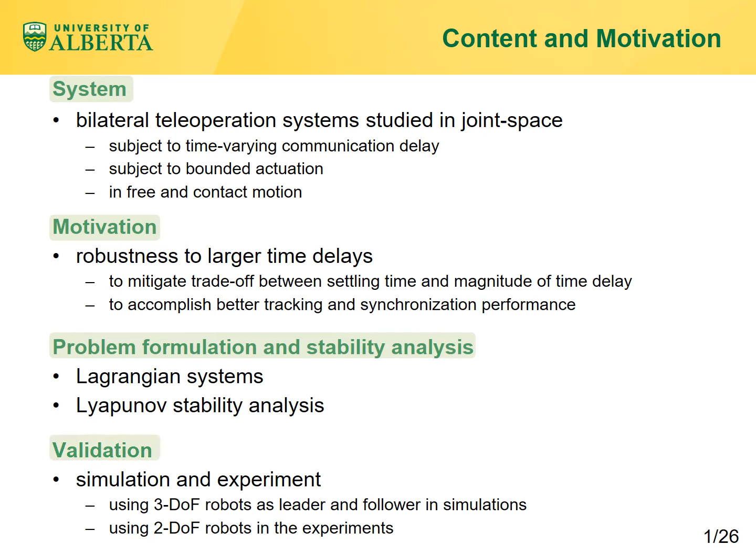Also, Lyapunov stability theory is utilized for stability analysis. For validation of theoretical findings, we have done simulations and experiments. Here you see the schematic of a bilateral teleoperation system. A bilateral teleoperation system is comprised of four main elements, namely leader robot, follower robot, communication channel, and controllers.

The controlled coupling between robots makes the follower robot to be under the control of an operator who manipulates the leader robot. Specifications that usually are studied in these systems are stability of the system, performance including tracking in joint space or task space, and force reflection or generally transparency, which measures the quality of teleoperating and how good the force reflection provides the operator with a sense of manipulating the object directly.

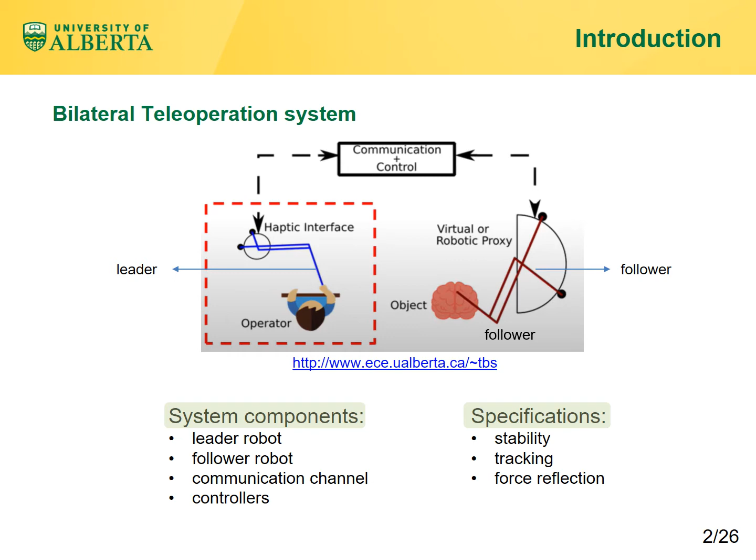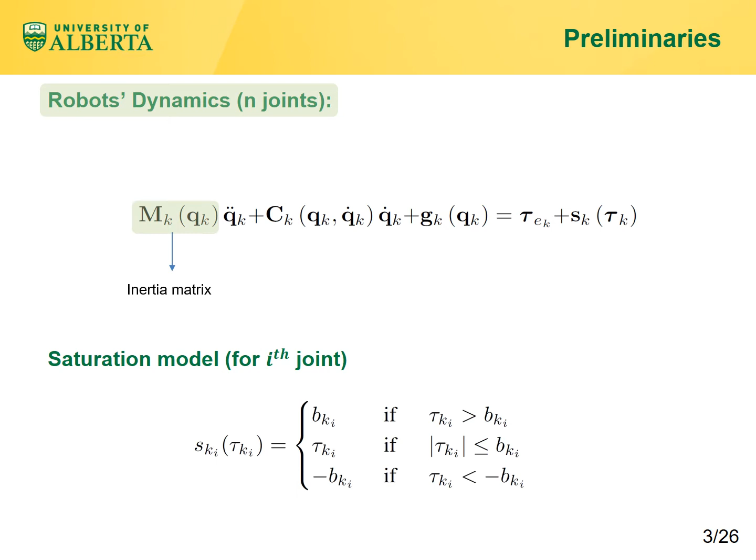This work studies bilateral teleoperation system in the joint space, given that the manipulator's motions are modeled by Euler-Lagrange equation. M_k is inertia matrix, C_k is Coriolis centrifugal matrix, G_k is the gravitational vector, tau_ek is the exerted torque, S_k(tau_k) is the control input subjected to saturation, q_k denotes the joint positions, q dot_k denotes joints velocities,

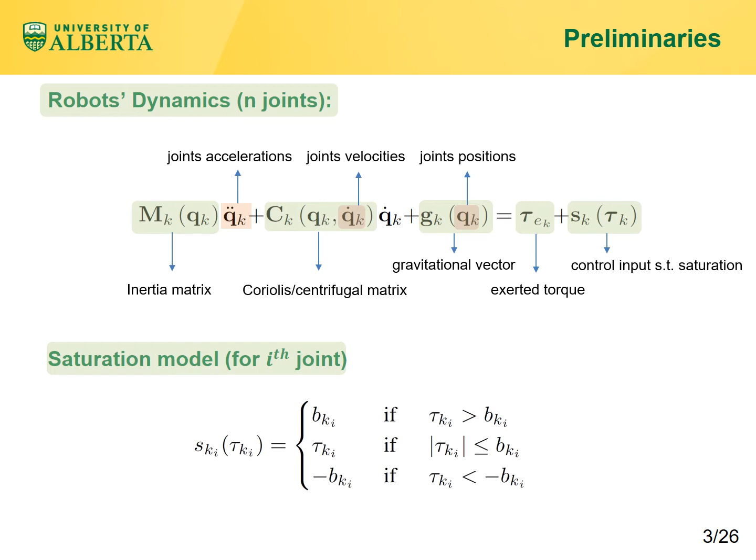and q double dot_k denotes joints acceleration. The saturation of the control signals is modeled by saturation function, where B_ki is the saturation level of i-th actuator and tau_ki is the controller of i-th actuator. Note that the subscript k shows leader and follower robot.

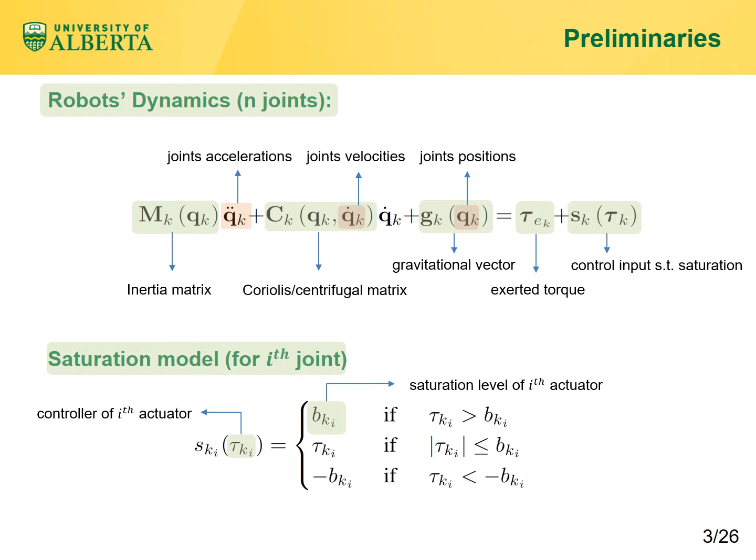Some assumptions are considered. The saturation level of each actuator is larger than the upper bound of the relevant element of the gravitational vector. Here, omega_ki is the upper bound of i-th element of the gravitational vector. The first assumption implies that each actuator can overcome its corresponding gravity. Second, time-varying delays are assumed to be continuous in time.

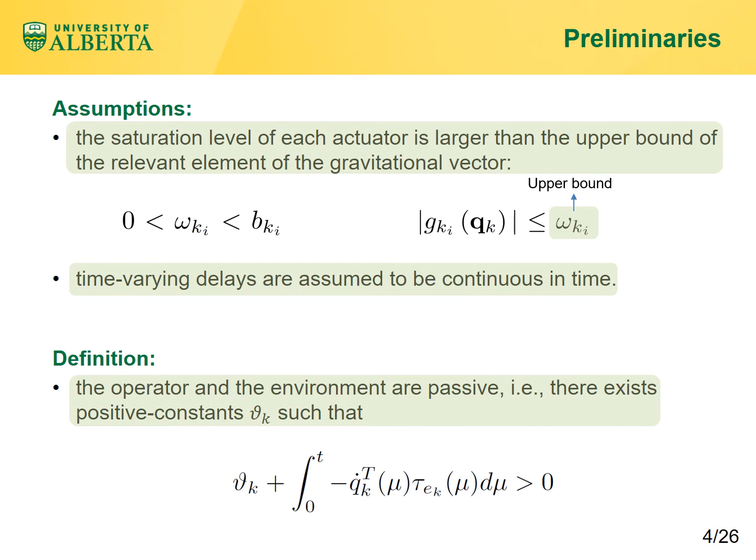Also, we have a definition that says the operator and environment are passive if there exist positive constants such that the relation you see is satisfied. Joint position errors are defined in two sides, namely leader side and follower side. Since the system is a bilateral teleoperation, signals are mutually exchanged between two robots.

In the leader side, the error is the difference between joint positions of the leader and delayed positions of the follower that are transmitted to the leader side. d_s is time-varying delay in the follower to leader communication channel. In follower side, the error is the difference between the joint positions of the follower and the delayed positions of

the leader that are transmitted to the follower side. d_m is time-varying delay in the leader to follower communication channel. Also, e_m0 and e_s0 errors are defined for ideal conditions, meaning having zero delay.

Here is the proposed nonlinear controller where sigma 1 and sigma 2 are positive real numbers. Capital P is a nonlinear function that has some properties, which will be mentioned next. G_k is for gravity compensation. Also, for simplicity and later usage, the first three terms in the controller are defined as delta_k.

If we define small p_i as the elements of the nonlinear vector function capital P, they are required to have some properties. They are strictly increasing, they are continuous, they are passing through the origin, they are concave for positive arguments and convex for negative arguments, they are odd functions, and they have continuous first derivative around the origin. Also, N_i is defined as the supremum of scalar nonlinear function p_i related to the joint i.

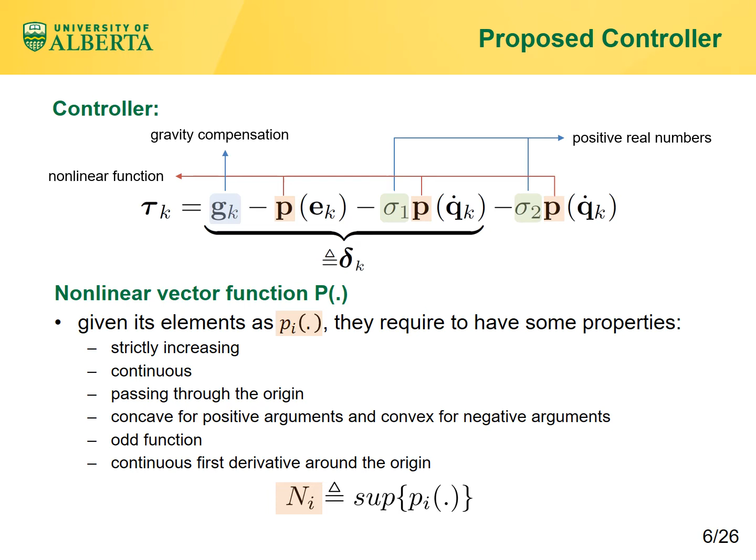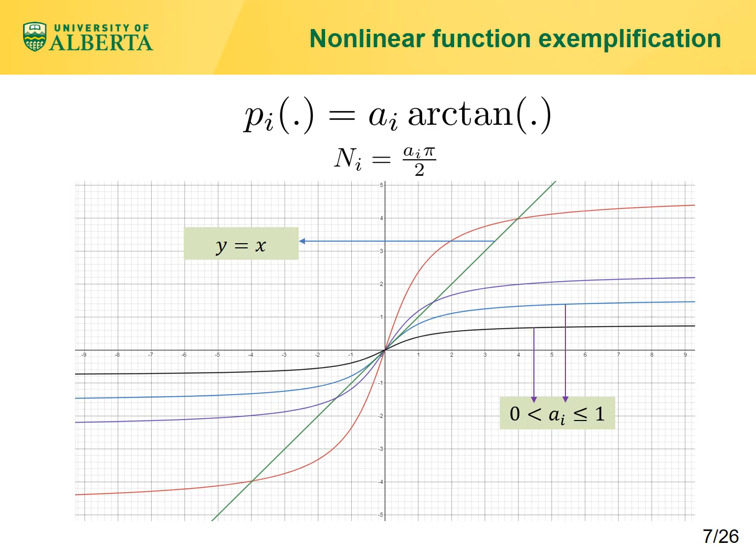For instance, the arctangent is a nonlinear function that embodies all the mentioned properties in the previous slide. You see the function in two cases. First, a_i is bigger than 0 and less than or equal to 1. And second, a_i is larger than 1.

Here I bring up two lemmas that are utilized in the stability analysis. Please note that d bar sub s is the maximum of time varying delay in the follower to leader communication channel, and also d bar sub m is the maximum of time varying delay in the leader to follower communication channel.

Let x sub t be the state of the system where it is equal to x of t plus zeta, and x of t is comprised of joint positions and velocities. Zeta is between minus d max and 0, where d max is the maximum time delay across the communication channels.

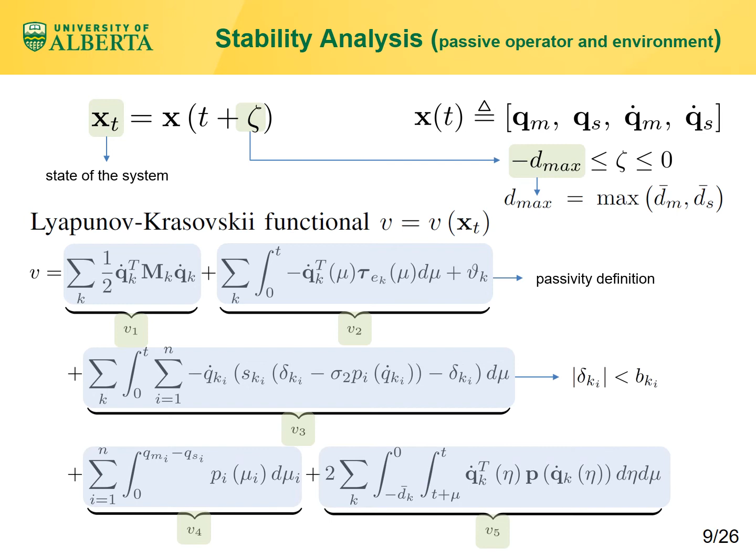For stability analysis, we come up with a Lyapunov-Krasovskii functional where it is the summation of v1, v2, v3, v4, and v5, where v1 is in a quadratic form, so it is positive. v2 is positive because of passivity definition. v3 is positive if the absolute value of delta sub ki is less than b sub ki. Also, v4 and v5 are positive since the vector function p is an odd function.

The time derivatives of the Lyapunov functions would be respectively as, and therefore v dot would be the summation of these terms. Finally, the time derivative of v can be simplified to the relation you see, so for having v dot less than or equal to 0, we need to have sigma 1 larger than 2 times tr, where tr is the maximum round-trip delay defined as you see. Thus we have three conditions, where the first one is equivalent to the relation mentioned for ni.

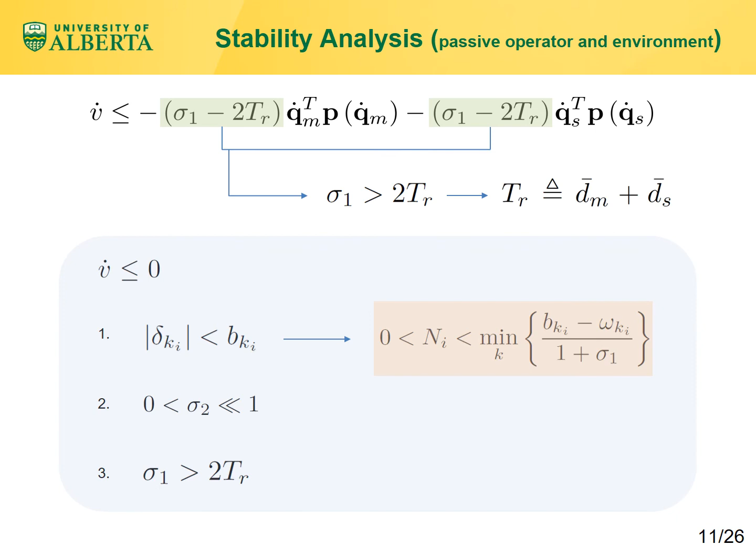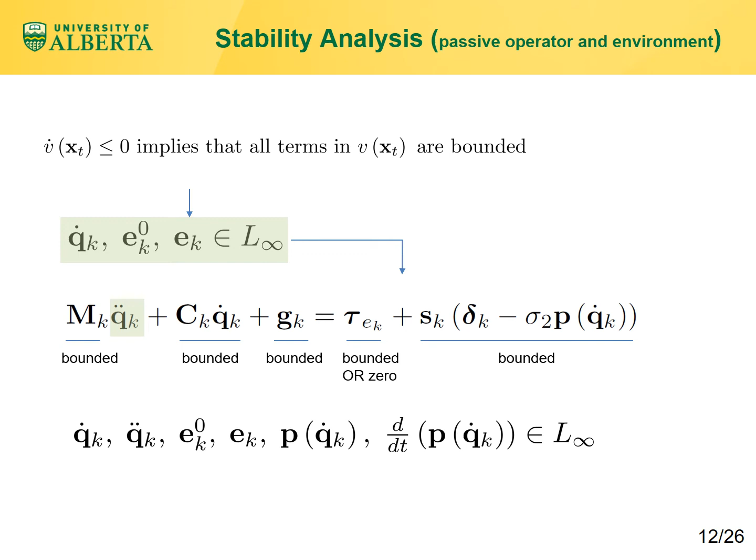v dot less than or equal to 0 implies that all terms in v of xt are bounded, so error signals and joint velocities are bounded. By substituting them into the closed-loop dynamics, and given that these underlying terms are bounded, we can conclude that the accelerations of joints are also bounded. Given that the derivative of the function p is bounded, we can conclude that these are bounded.

Consider again the final relation we found for v dot. By defining psi and integrating both sides of this relation from 0 to t, and regarding the figure you see, we would have three cases, which implies that q dot k or p of q dot k is a member of L2 space, or the L2 norm of those time functions is bounded.

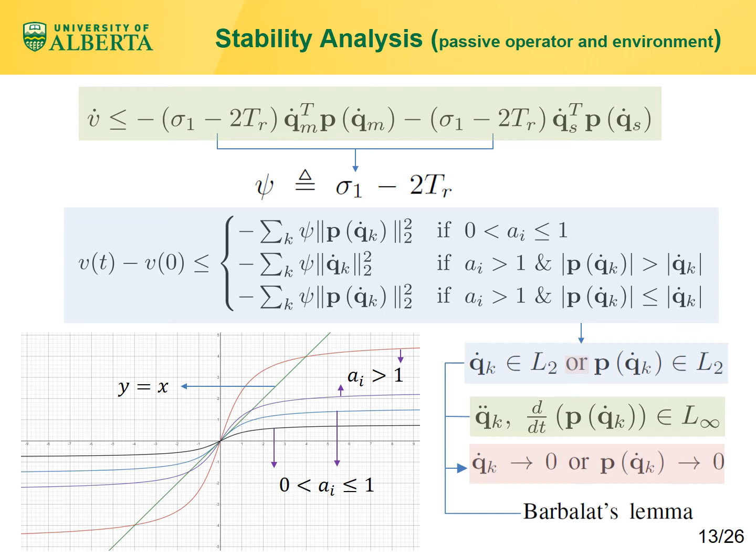Previously, we knew that the joint accelerations and the derivative of p of q dot are bounded, so using Barbalat's lemma, q dot k or p of q dot k converges to 0, which has only one meaning, that q dot k converges to 0, since the nonlinear function p passes through the origin. We showed that the joint velocities converge to 0.

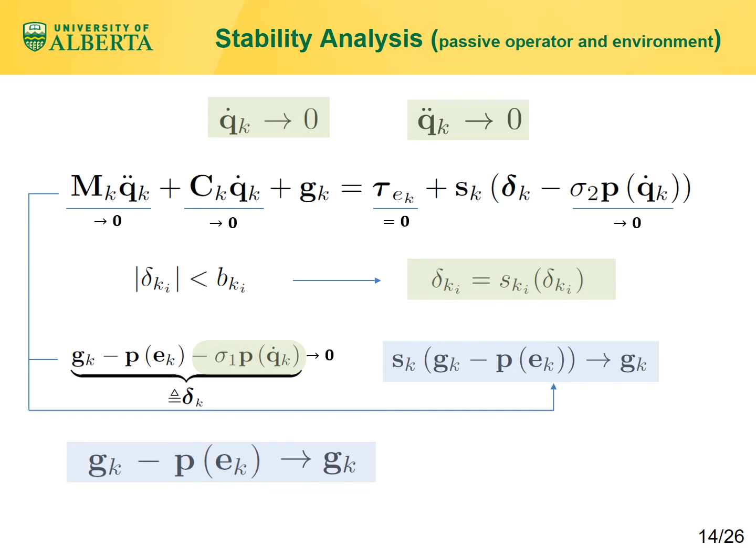In a similar way, we can show that joint accelerations converge to 0 as well, which I spare you the details. Considering the closed-loop dynamics in free motion and noting that these underlying terms converge to 0, and knowing that delta sub ki is in the linear part of the saturation function, and delta sub k becomes g sub k minus p of ek, then we have, and so, which implies that p of ek or e sub k converges to 0.

Now consider the case that the operator exerts a non-passive force and the environment is passive. Let x sub k be the position vector of the robots' end effectors. We know that the end effector velocity is equal to j sub k multiplied by joint velocities, where j sub k is the Jacobian matrix.

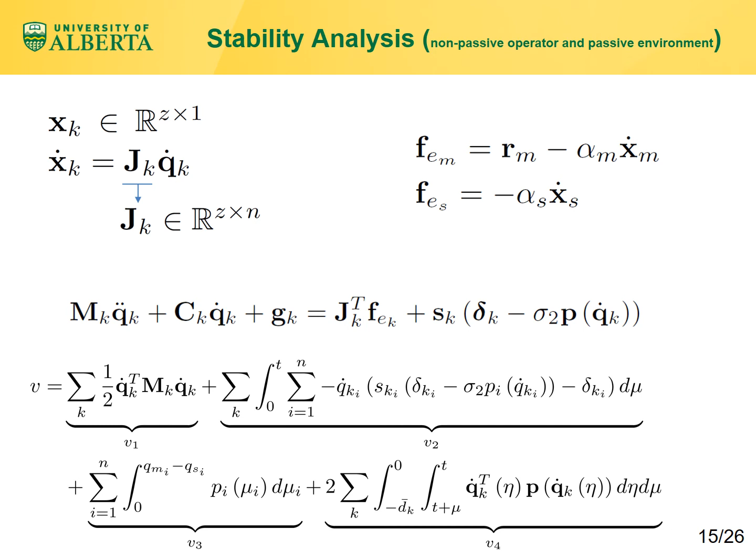Let f sub em and f sub es be the operator and the environment's applied forces respectively, where r sub m is a positive bounded vector and alpha m and alpha s are bounded non-negative constants. These forces will be substituted into the closed-loop dynamics. For stability analysis, we come up with similar Lyapunov functionals you see as v1, v2, v3, and v4.

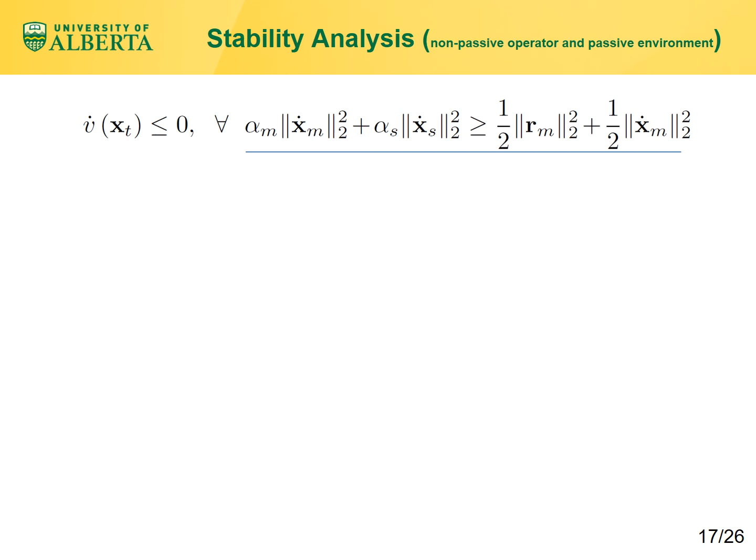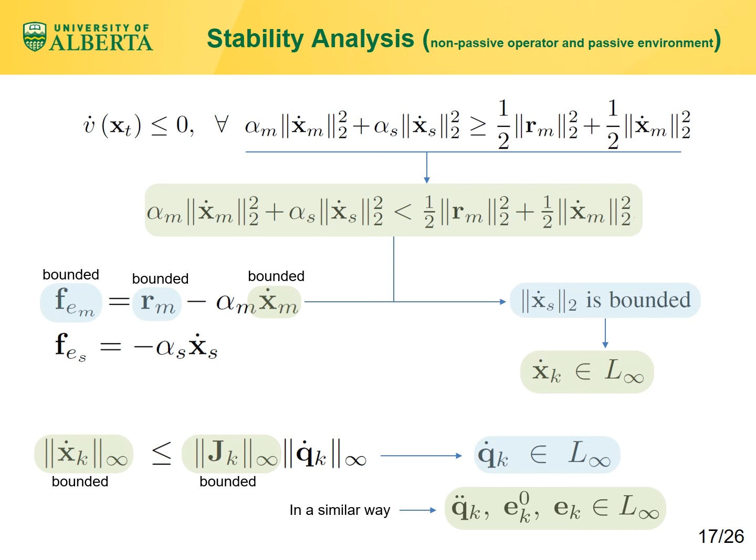Consider the situation that the underlying relation is not satisfied. Now again, consider the applied forces I introduced in the previous slides. Since in practice the operator can apply a bounded force, then f sub em and rm are bounded, and consequently x dot m would be bounded, using which one can conclude that x dot sub k is bounded. Since x dot k and Jacobian matrices are bounded, then joint velocities would be bounded. In a similar way, we can show that the joint accelerations and errors also would be bounded.

For a study of force reflection, suppose that the end effector of the follower robot is in a hard contact with the environment, which implies that the joint velocities and accelerations are in a quasi-static situation. Substituting this into the closed-loop dynamics, we can see that the exerted torques can be bounded according to the nonlinear function P of Ek.

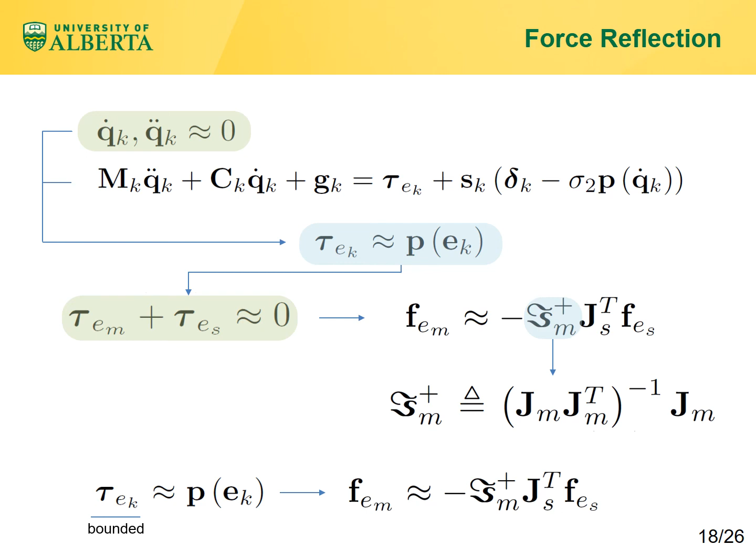Since P is an odd function, then the summation of applied torques would be approximately equal to 0, which implies that the force the environment applies on the end effector of the follower has a relation with the operator's applied force, where this guy is the pseudo-inverse of Jm transpose. Since tau Ek is bounded by the nonlinear function P, then it can be concluded that the reflected force is also bounded.

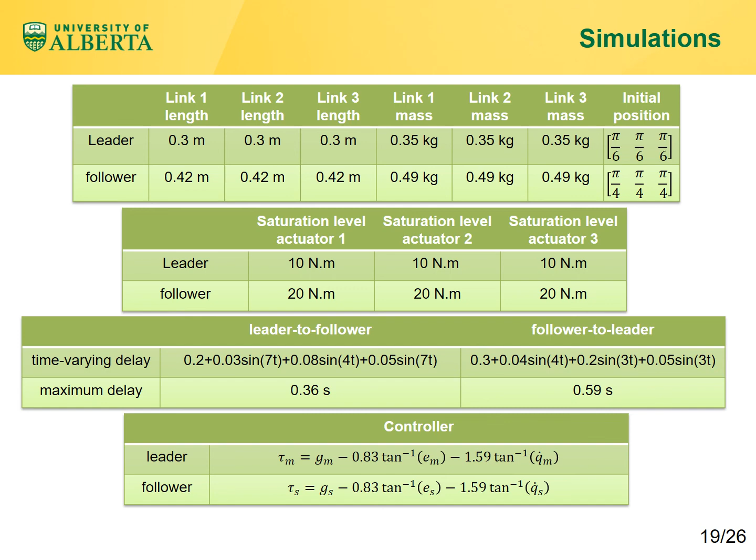For simulations, the leader and follower robots are considered to be 3 degrees of freedom planar robots. The first table shows the physical parameters of the robots. The second one shows the saturation levels of the actuators for each of the manipulators. The third table shows time-varying delays and the maximum time delays. And also the last table shows the controllers.

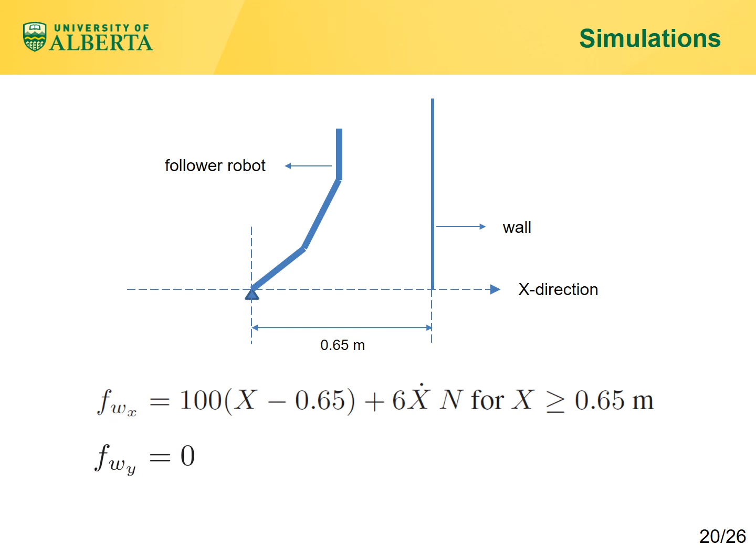To simulate the force reflection, we assume that in the follower side there is a wall at positive x direction and at x equal to 0.65 meter. We suppose that the wall behaves like a spring damper such that if the end effector of the follower robot exceeds 0.65 in positive direction, then the wall will exert a force in negative direction equal to the relation shown for f sub wx. Also, we assume that the wall doesn't apply a force in y direction.

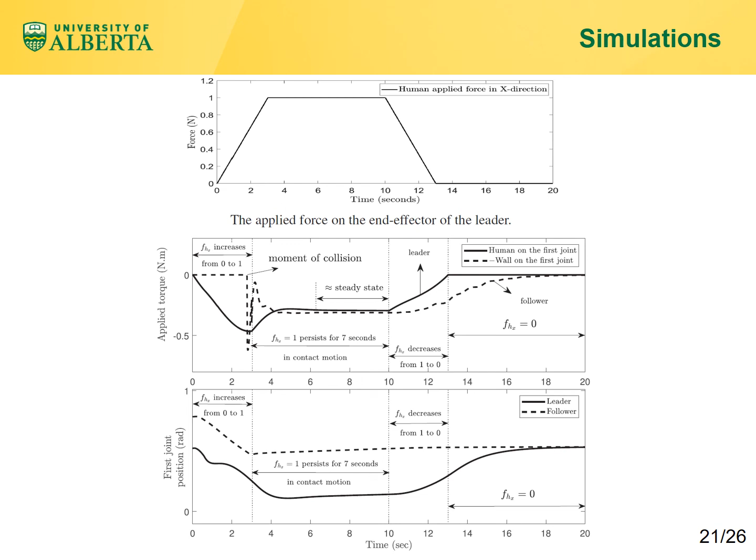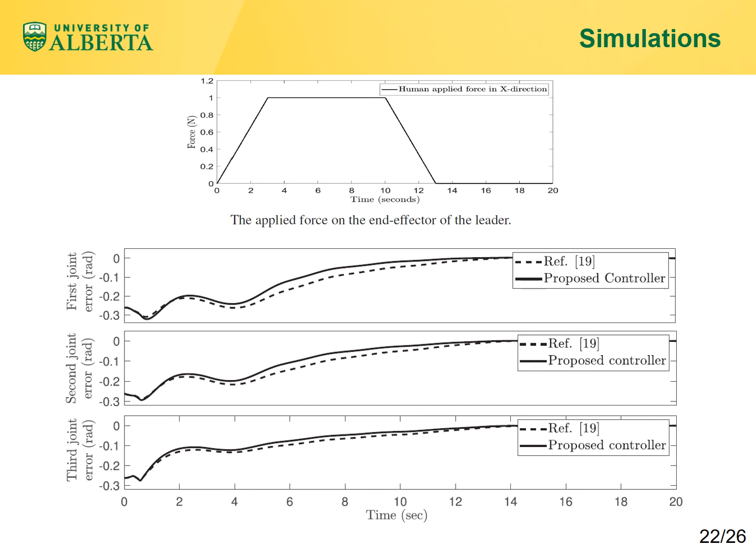In these results, again the first figure shows the force the operator applies in x direction on the end effector of the leader robot. Figure 2 shows the joint position errors in free motion for the proposed controller and the benchmark controller. As you can see, the proposed controller outperforms the benchmark controller.

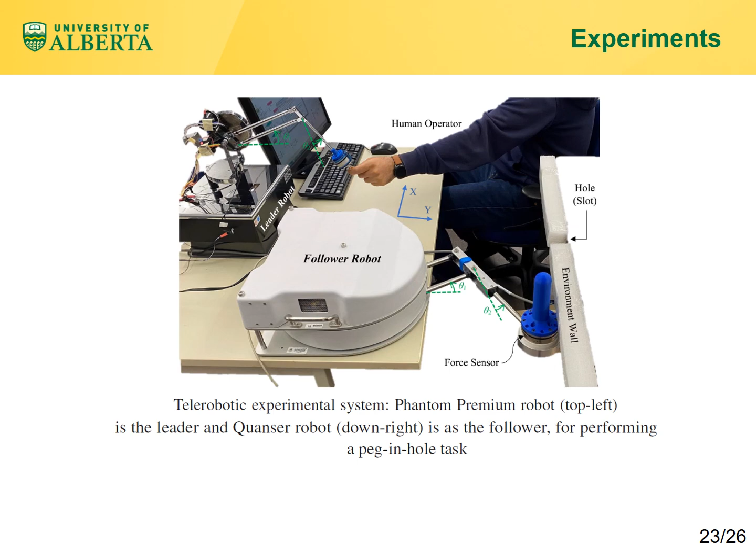Here you see the setup utilized for experiments. We have experimented the proposed controller on a bilateral teleoperation system comprised of a Phantom Premium robot as the leader and the Quanser robot as the follower. The first joint of the Phantom robot is fixed to make it a 2 degrees of freedom robot. We utilize this system for performing a peg-in-hole task.